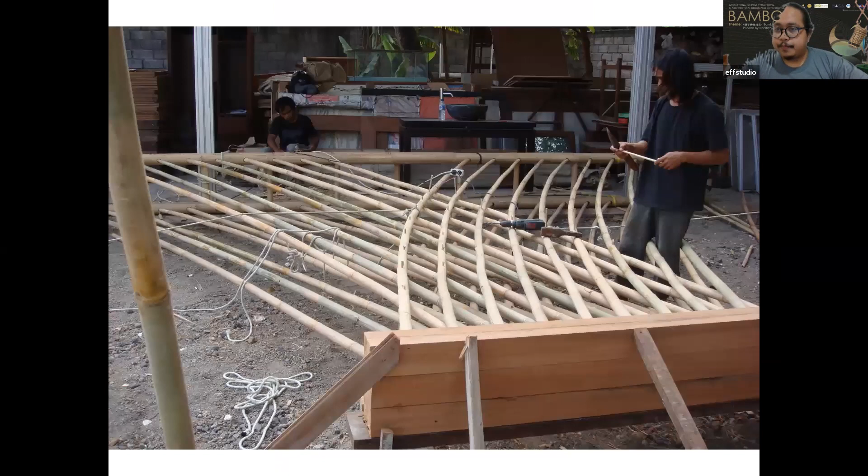It's about $50 maybe, to stand the tent up. So, okay, that's a good question. I'm thinking what kind of material, what kind of structures I need to make. So that's how I met with bamboo. That's how I realized that actually there are some materials in the world that are really nice, flexible, and if we are creative enough, knowing the characteristics of these materials, cross-bracing it - even though they are small, they're easy to bend into something.

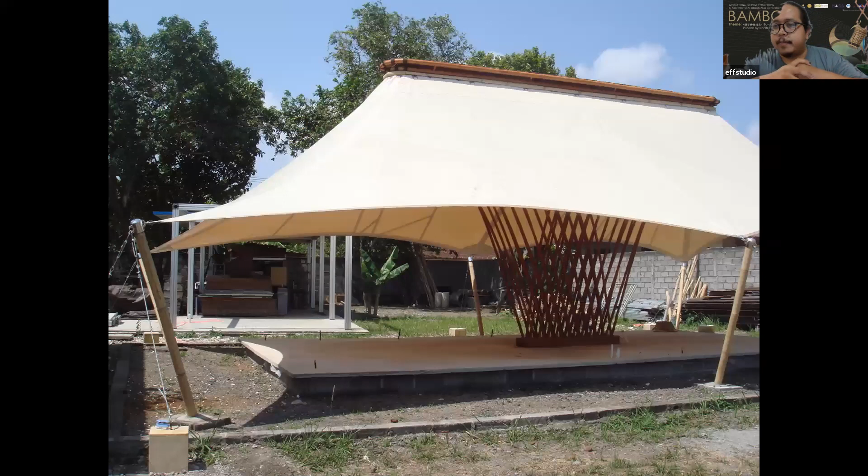So I just made a preliminary design, something like this, not yet really discussed with the engineers, but it ended up making something like this, and it happened - a $50 structure made of bamboo, still untreated. And when I discussed it with my engineer, there were still a lot of defects in the structure, but it stood at that time. It gave me confidence, like, oh, actually these are cool materials that I need to study.

Indonesia and also Malaysia have a lot of these materials. Why weren't we creative enough at that time to create something like this? And actually this is strong, it's beautiful, and it's cheap - consider cheap, consider effective cost. So after this, looking from the interior also, it's quite nice.

After that, I worked for a prefab company, which was kind of boring at the time. So in the art side, I was looking for a new challenge - like, why does something I build always have to be square and modular? At that time, the universe heard me, and there was a vacancy for architects at the Bamboo school, the Green School. So I applied, and then I joined them.

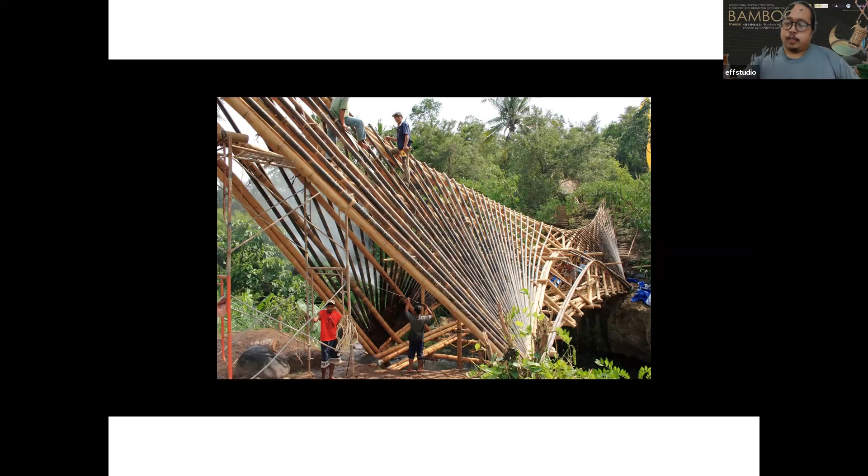I was involved with them from their early stage, before the school opened, with this bridge. Again, I think this story - what I'm telling you now, especially for the students, for the competitions - it's more about creativity, out of the box, trying something new, experimental.

So I'll show you mostly, like, when we developed the Green School, we did a lot of experimental things, like this - the top end of the bamboo, instead of throwing it away, why not make something fun? And that becomes a small shelter like this.

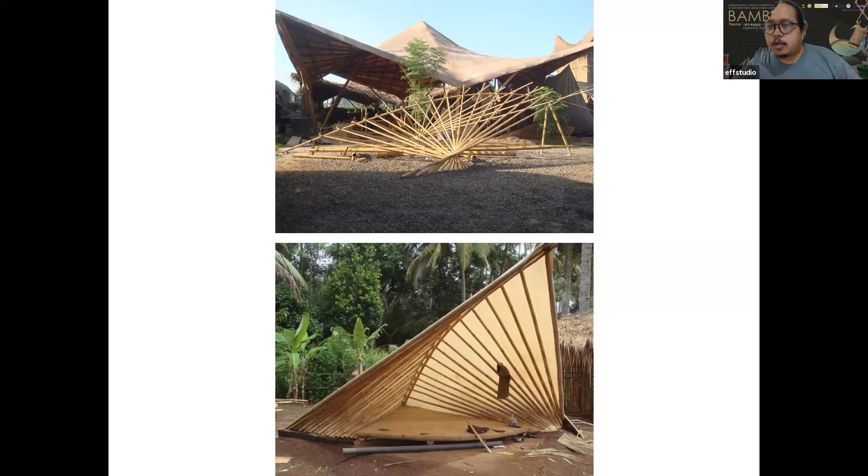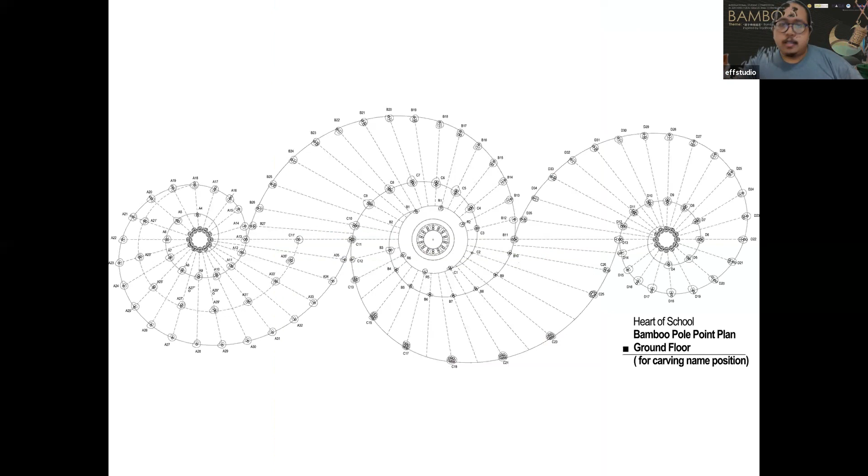And then the one I'm proud of, because I was responsible for the biggest building there, the Heart of School - I controlled the design, controlled the construction, 3 stories, one of the biggest bamboo buildings in the world, I think. And then my name is carved there. If you go there and get to the highest poles, there's my name - I asked the laborers to put my name there.

So again, but then I'm working for a person, for a boss. And as an architect, I'm trying to figure out, what if I go independent? Now my independent side, a little bit rebellious, I'm looking for a new challenge then.

So I thought, but then my knowledge maybe wasn't good enough. So I grabbed my savings and went to London to AA. I just took the summer course - not going for the master's degree, since that takes longer. A summer course would be ideal, a few weeks, 2 months I think. But it really helped me escalate my creativity.

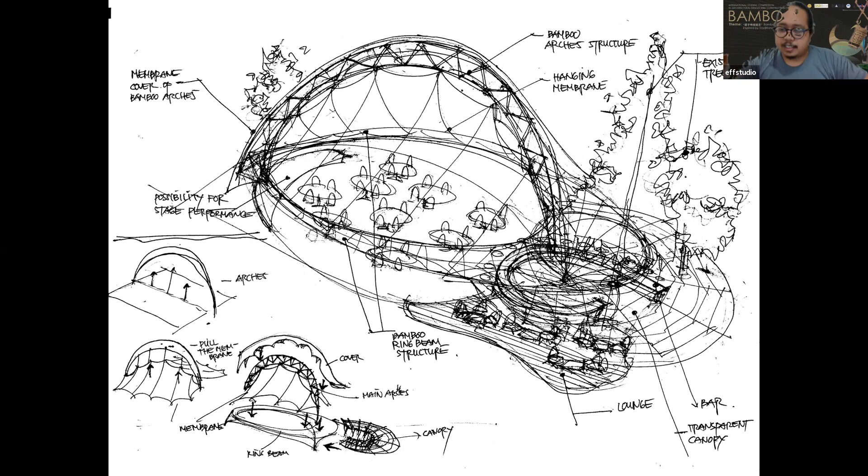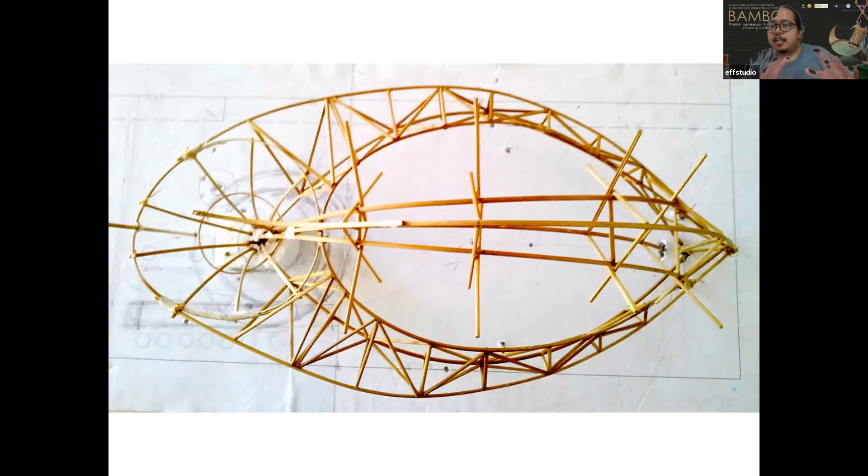Then we started making the models. We tried to discuss with our engineer to make it mix bamboo and steel structures - the style is space frame. But we needed that space frame for a 15-meter span with no columns.

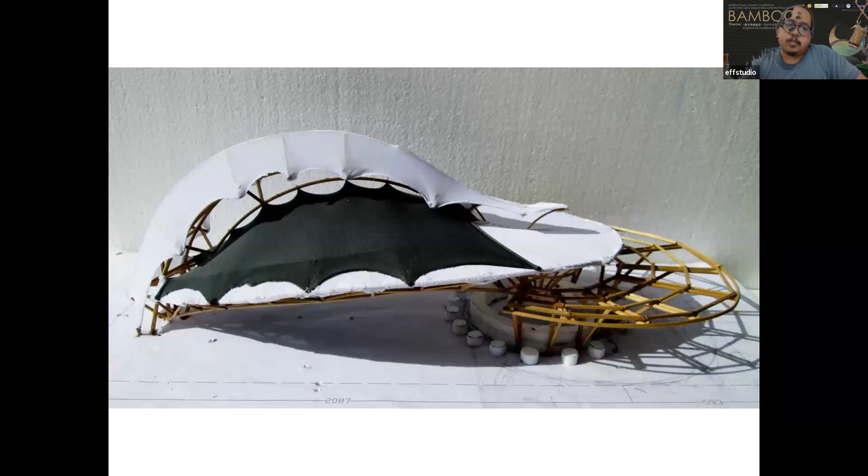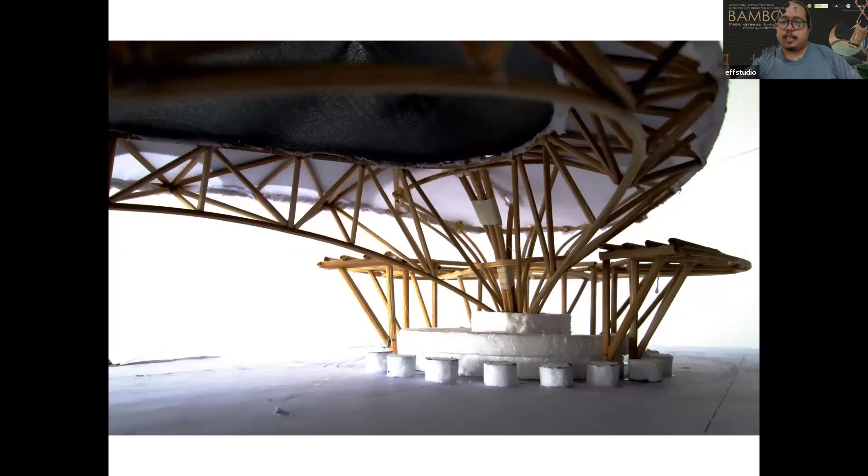And then we made the design of the membrane too, and this looked nice - our client liked it. But then we talked with the wind expert, and he said this will catch the wind, so when hard wind happens your building will blow away like a kite. This is just dangerous. So we studied the space more, and it became the round bar, which worked perfectly.

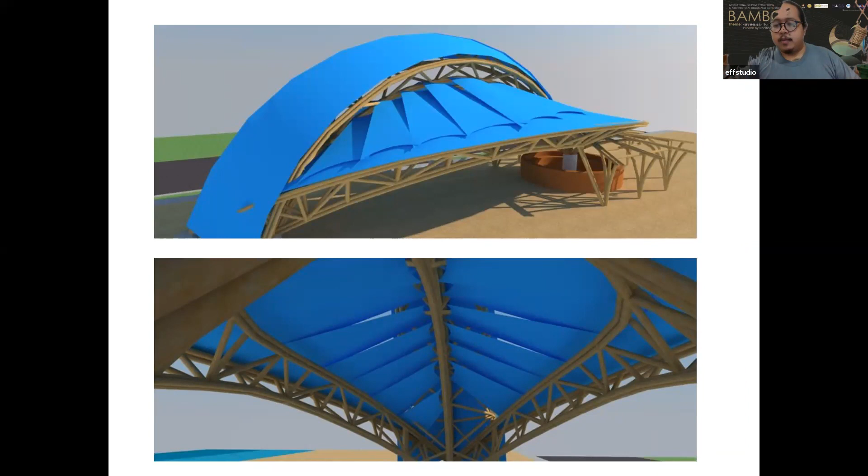We try to already place the membranes, but not in the middle one, and then we do adjustment. Since bamboo is lightweight, we need to make sure the wind can go through and not get caught. So we make it become kind of like fins when it's open.

It works well, it's eye-catching compared to the others. Actually, we are only one of the buildings that follow the rules, using lightweight structures, lightweight roof, and no floors. But unfortunately this is now demolished because the others were not following the rules, so the government cut them all. There's no excuse, because if we said we are following the rules but the others are not, when we cut the others and leave this one, it becomes another issue. But my client said it's okay, fun - at least we follow the rules, and at least they already got the big event points, so it's okay for them.

But honestly, these buildings brought me to exhibit in Frankfurt, Germany at the time. They were so pleased with these kinds of structures. I'm sorry if you want to see this one, it's not accessible anymore. We hope we will make something again in Greater Rawan in the future, but this looked nice, I like this.

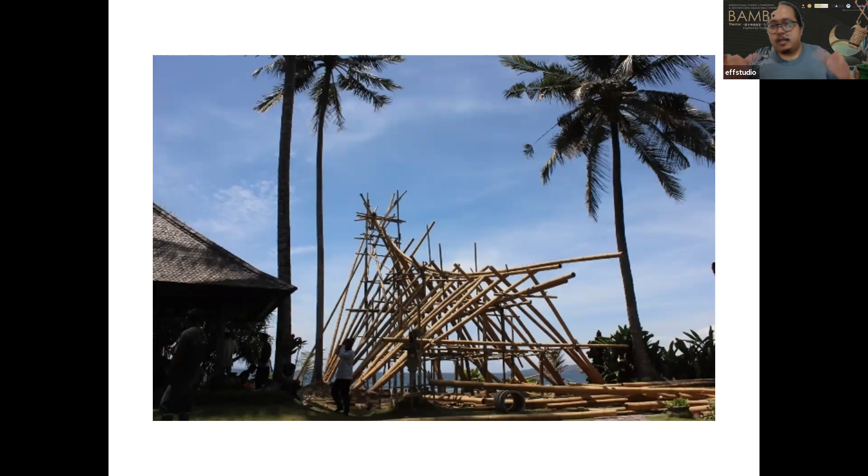That's one client, from Lotus. When we make one client happy, we hope they give us another job, so that's Lotus in Greater Rawan giving us a Lotus in Candidasa, East Bali - a small wedding chapel. I think it matches also with these competitions of small structures - it's small, but could be fun, could be really interesting. So the chapel has triangular structures, really solid structures.

But the thing that makes it different for us - the rafters. Mostly the rafter is vertical, but we try to make the rafters horizontal, using the characteristic of the bamboo. If you see that spread out, that can only easily be done with bamboo. If you make that spread layout rafter with wood, it would be difficult - you'd need to bend the wood quite hard. But we just tried to understand and apply the possibility of using bamboo materials.

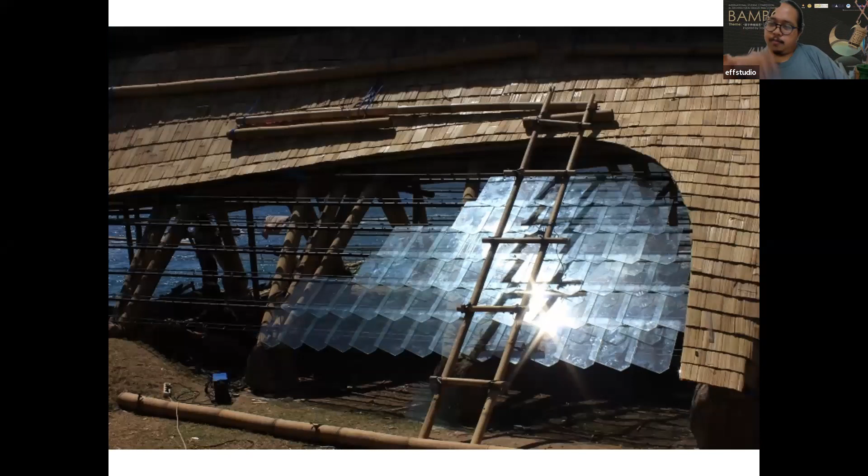This looks amazing as a ceiling from inside, that pattern of the rafters. And the one thing that makes this project more interesting - we needed to make transparency on the sides, because if all the roof goes down, it will be dark. But at the same time, it would become a wind tunnel if we had a solid surface. So we used this kind of fish scale custom-made glass with a gap between the glass pieces, which was really difficult to draw and difficult to supervise during construction. But when it was done, we were really pleased with it.

It's really a small structure, only about 6x4 meters or so, but it looks amazing. In Indonesia, because it's considered a semi-permanent building, we can build more than the retaining wall of the beach, which in other areas you maybe cannot build something like this. From the sea point of view, there's a lot of boats crossing from Bali to Lombok in front of this resort, so this becomes an icon of the resort. Everyone passing by asks what kind of building that is, and wants to go there and take a photo.

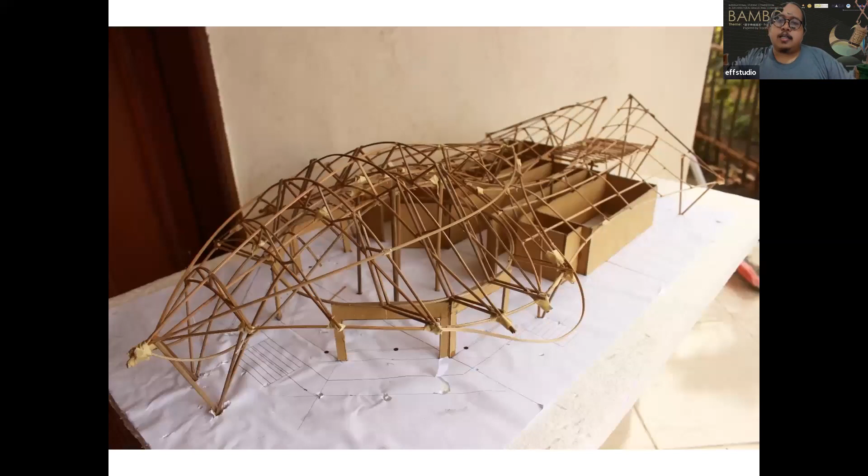That's another project from Lotus. After we accomplished the wedding chapel, they wanted to rebrand and refurbish the old buildings, their main building and restaurant. As you can see in this model, the cardboard one shows the concrete structures that we want to keep, but the roof before was very simple.

Like a saddle roof, and then we changed it to a bamboo roof, something like this. Because their logo is a manta ray, why not make a manta ray for them? So it's manta ray structures, and I'll show the drawing details we made for them. It's between manta ray and something behind, but yeah, it's this manta ray covering the existing structure. So it's old and new.

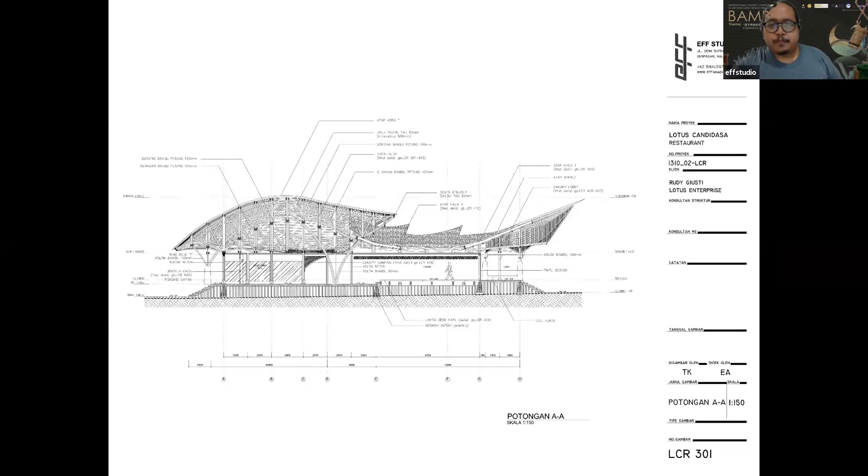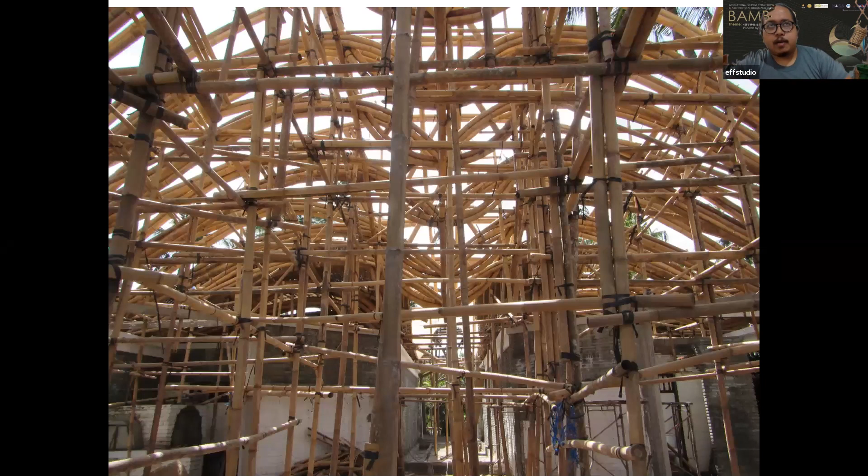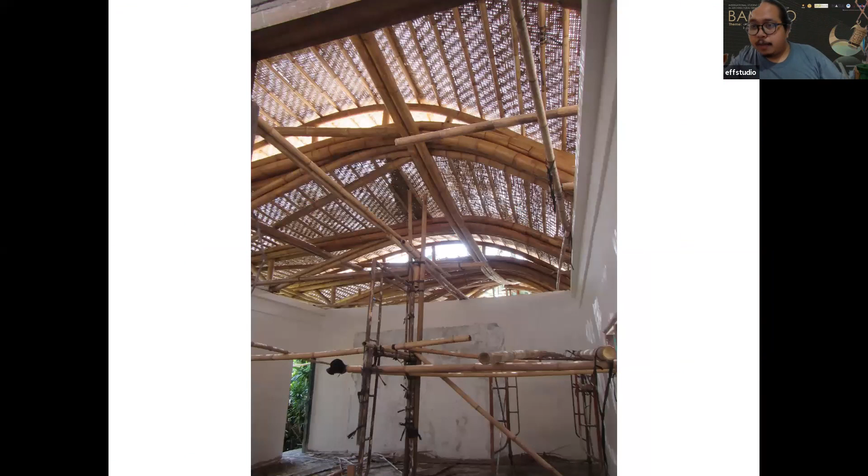This is when it's almost done with the ceilings. We did it a bit parametrically, but manually parametric, because the laborers cannot read Rhino scripts or something. So we make the model and make sure every single opening is slightly different and twisted, which is cool.

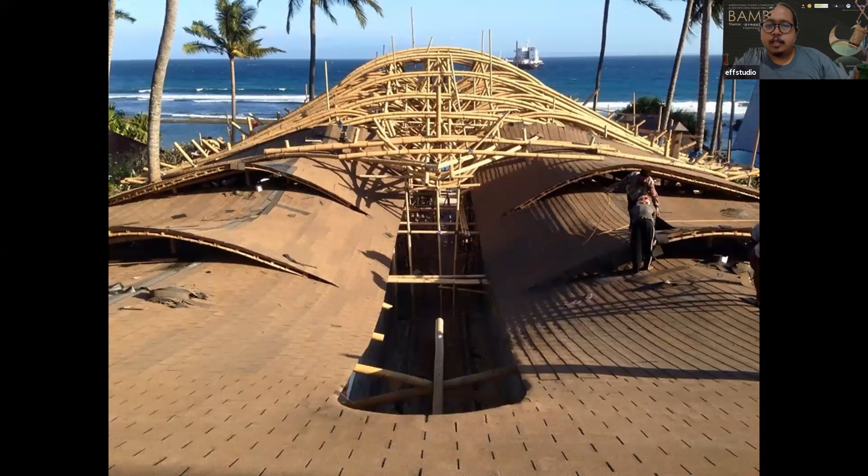You can see this is from the top. We use asphalt shingles because the roof angle isn't that steep, and it works. It's less maintenance, and anyway not many people will see it from here. The guests mostly see from there. This is the entrance, where we put the skylights.

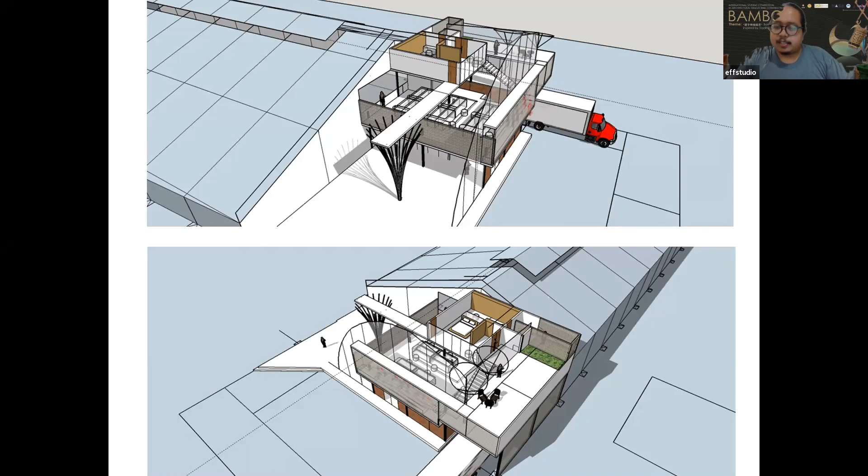But then the client asked us for the front portion of the factory to have a bamboo roof. So they challenged us to design a bamboo roof with a 30-meter span. Not competing, so: the steel 30 meters is easy, but bamboo, how about bamboo? Can you accept the challenge? And yes, we accepted it. So we made models again.

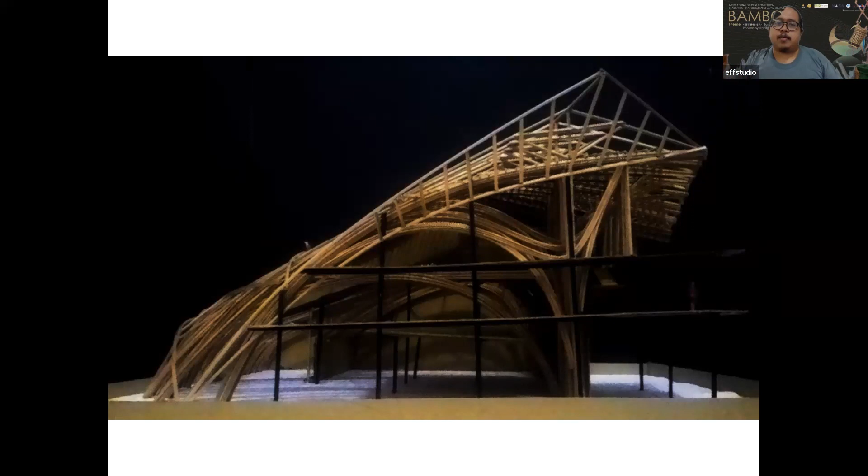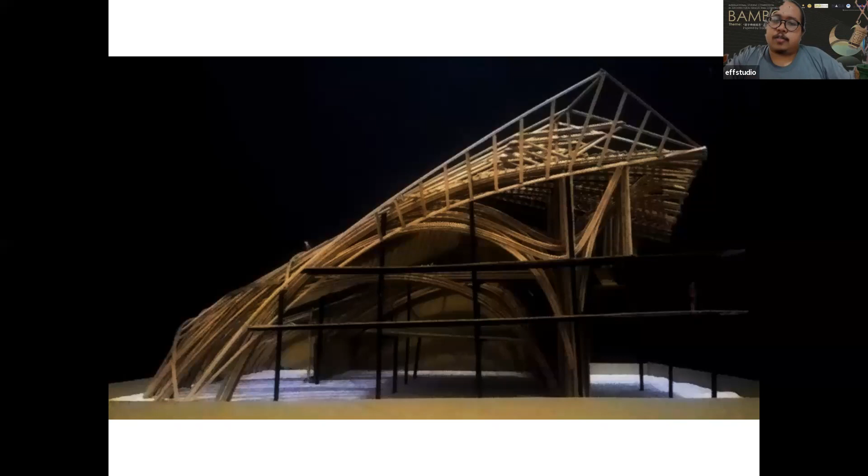So we still use steel structures for the floor and the wall, the facade, because they will hold a lot of glass. But inside, we use bamboo. These are the kinds of structures we made—a series of long truss structures, like 30-meter trusses.

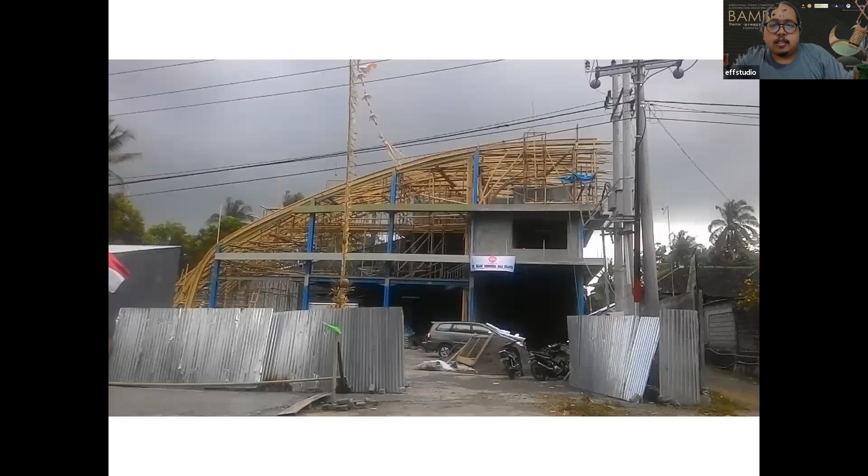This is from the front. In the front we still use steel because the glass is heavy and holds a lot of wind load maybe, so bamboo isn't strong enough for that. So we combine them, and again these structures are really organic.

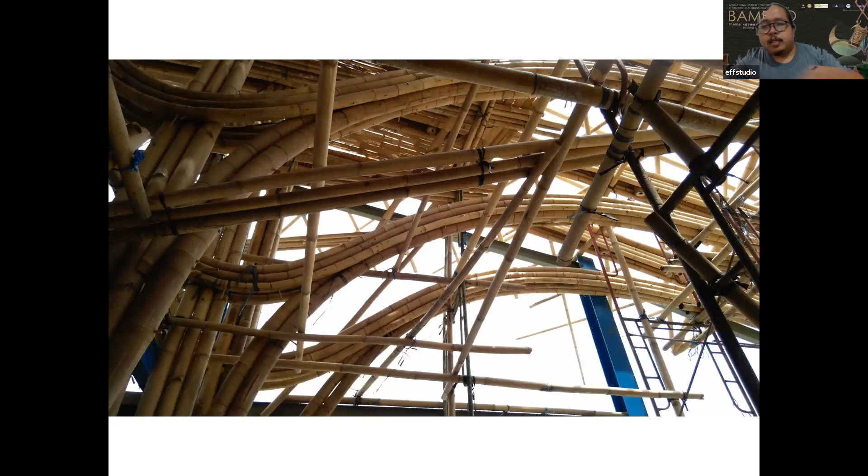We try to get curved bamboo and bend it here, combining it as you see—this is from the second or third floor. You see that series of bamboo truss we designed, a little bit melted somehow. And that's my stuff, the proportions with the big-span bamboo truss structures.

So it can be done, it's 30 meters. And anyway, I'm confident enough because the roof is very lightweight.

The metal roof is very lightweight, so I'm okay with that. If the roof were roof tiles, I'd need to think about it more, but because the roof is metal sheets, it could be possible.

So this is from the front. We designed the front to not be massive glass, so the wind can go in, reducing the use of AC. From the outside you will see glass, but when the lights are on, you will see the interior bamboo structures. I don't have photos, but you can go to Bali and see it in person, it'll be nice.

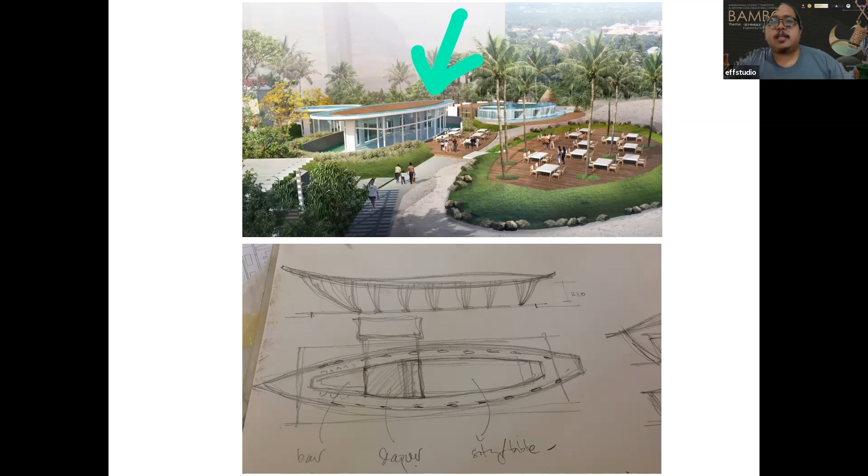And this is the boat wings, I will say. That's another challenge from our friend architects who designed the resort. He had a challenge of how to make an iconic restaurant. It's called Cukung, which means like the boat. My friend tried mimicking the boat shape but it didn't work. He said, okay, let's make it work. So we made the models.

We're not against using other materials - for example, for the kitchen and bathroom, it's okay to use concrete, I think it's better. But for the rest, we can combine with bamboo. I'd like the combination between concrete, some steel, some glass, with bamboo - bamboo and friends, instead of all about bamboo. The bamboo still becomes the main agent to make it the characteristic building.

Another request from the guests - because this is in Nusa Dua, mostly guests from China, Taiwan, and Korea - they love to see the beach but don't want to get burned, they don't want to get tan. So they need an AC box while seeing the beach view, compared to American or European guests who maybe love being tan or dark. We need to understand this kind of tourist and provide for them.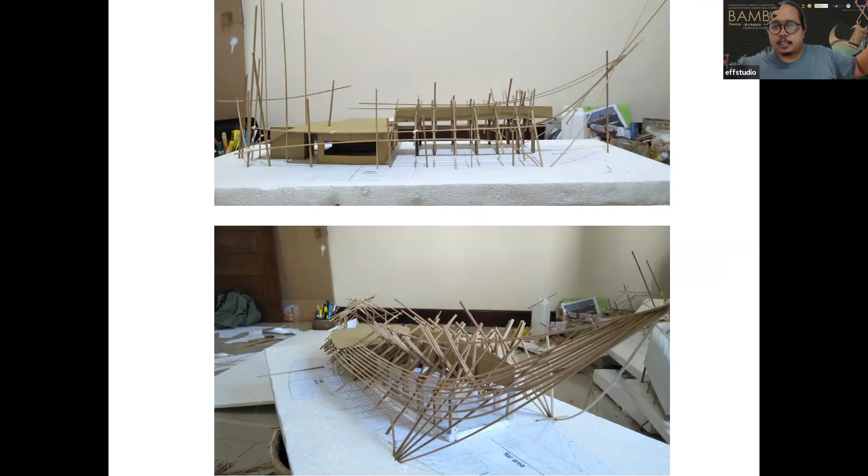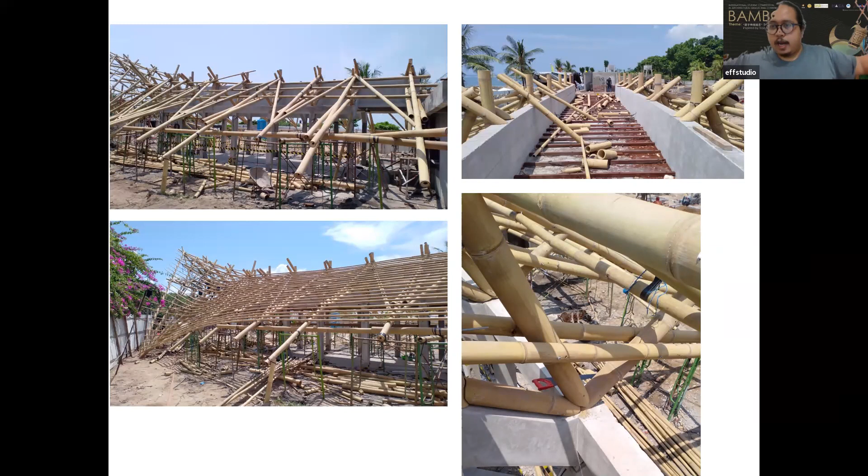So our idea is to make a glass box in the center, and put two wings attached to the glass to cover the outdoor, semi-outdoor dining. The shape looks like a jukung, like a boat. We tried to make another challenge with cantilever structures, so all the structures are centralized in the glass blocks, and the bamboo truss overhangs like 4 meters.

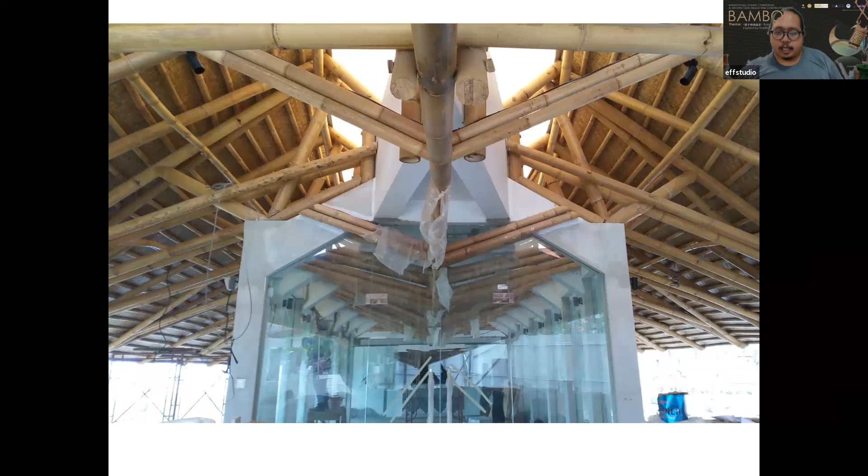This is when it's done. Again, it looks like a jukung, but the one I really like is this - glass structures in the center, glass with concrete, while the two wings overhang 4 meters to both sides. The advantage is that when you sit there, there are no columns bothering you. It's like 180 degrees, but you're still protected - you feel like you're outdoors but protected by the roof. For me, it looks amazing.

The clients really like it. Let me talk about the money here - they said their break-even point was only 2 months. I thought, I need to charge you more then. But actually, we love that the clients are really happy with this, and we're hoping to hear from them again to build another restaurant in their other properties.

When we push our challenge and create something that works, it's worth it. There's no bamboo buildings with no columns like this in Bali - I think this is the first time, so it's a good achievement for us. Again, this view gives you a nice, undisturbed view, but protected by the roof. That's the interior - we still put bamboo inside, not leaving it only for outside. So when people eat inside with the AC, they still get the bamboo feeling. That's the bar in the end - everyone loves to see the bar.

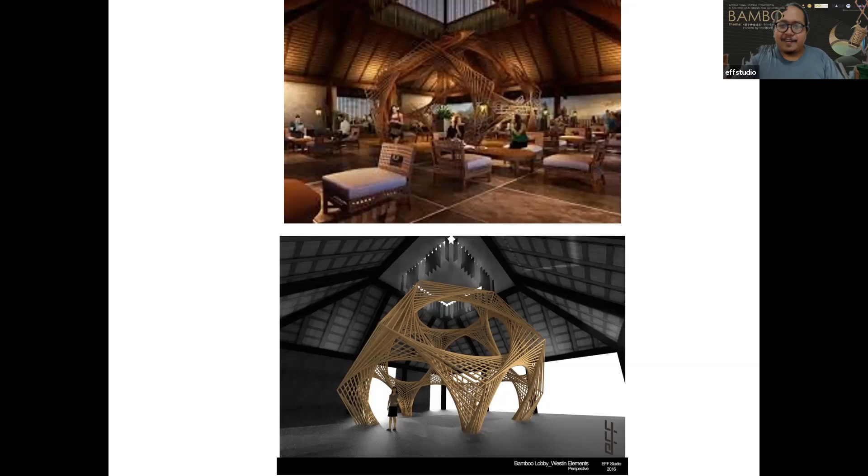We make the models - I mean not me, at least my staff. I'm just asking them to make this. It's really a headache, but then we got the ideas. This is a dodecahedron, a 12-sided polyhedron with a hyper in its sides. So they mix of them.

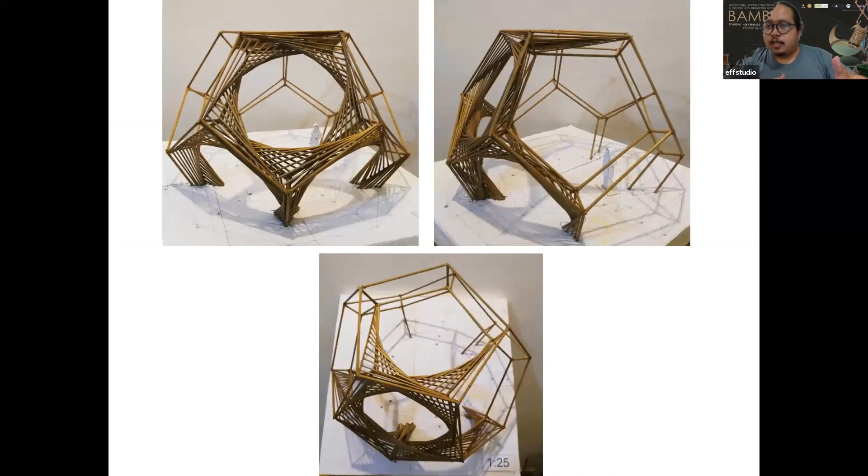To make these models is one challenge, and then to build on site, that's another challenge, because my staff had to be there every single day for about 2.5 months to guide the laborers - okay, this point going to that point, this point going to that point - because this is really hard.

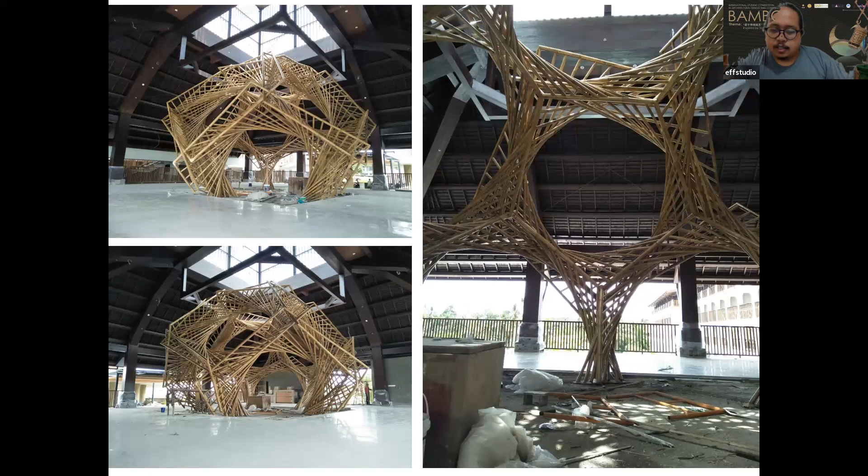But when it's almost done, it looks like, okay, it kind of works. And when it's done, a lot of people want to take photos here. So for me, I would say the design of the resort - a lot of resorts do the same thing - but because they have this stuff in their lobby, it makes the resort different and stunning. That's what we're trying to do. EFF Studio, maybe not designing the whole resort, but we designed, or actually this is Sonny Sutanto's design, and we make it work.

Making something like this - that's the lobby, and you see that structure in the center. Looks amazing. It's not that big, but it's complicated, and we were happy when it's done.

After that project, our studio thought, actually we can catch up with that kind of modern thing in the architecture world - like you guys, students mostly doing the parametric thing, making Rhino models. So instead of only doing models in 3D, why not develop really the main structures? But then the challenge is the material is expensive, so why not use bamboo? So we made another experiment with the hyper parametric thing.

We got the chance to be invited to make installations in Lampung. So we made a crown structure, and we introduced to the local people that you can use whatever bamboo you have - no need for a specific bamboo.

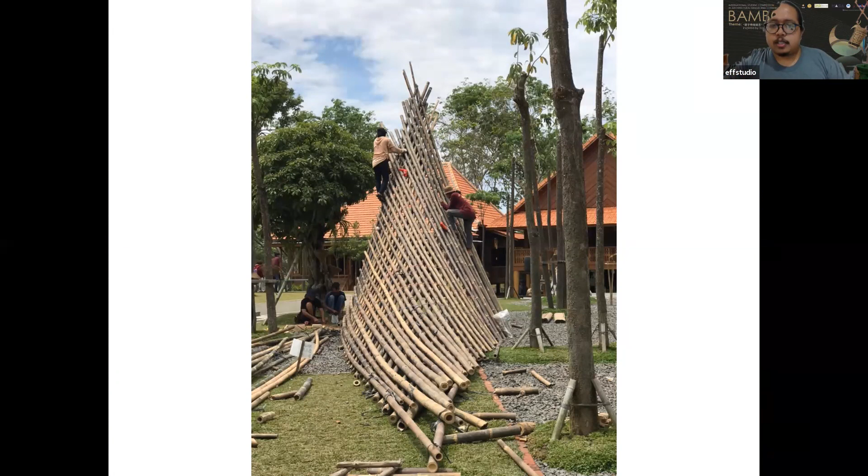And we made another one. We wanted to show that bamboo is so strong, not only as a structure, but you can walk on it. So we made a hyper bridge. This is the bridge before we flipped it - we made a really solid hyper structure like that. This is when it's done, crossing an alleyway below. This is a 10-meter simple bridge.

If you see this one, the bridge is there. Before getting to the crown, you pass the bridge first. So it gives people in Tubaba, Lampung, who know bamboo but don't know how to use it, or don't think bamboo is useful, a reason to start believing when they pass the bridge. They say, oh, it's strong. Yes, it's strong, even you can jump there, like 10 people jumping, and there's no problem with the structure.

I think the Bupati is happy. I'm still approaching him to create more bamboo buildings there in Tubaba, to show the people in Sumatra that bamboo can become something nice.

This one, I think the last two, we also got invited from the country Taiwan, in Taoyuan, to become one of the exhibitors in a Taoyuan art installation in 2020, as one of the artists from Indonesia. So it became like, okay, I would say the bamboo ambassador.

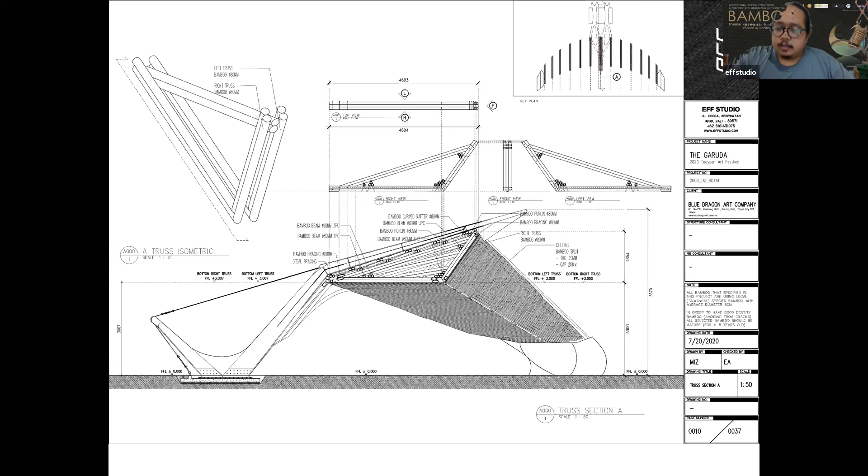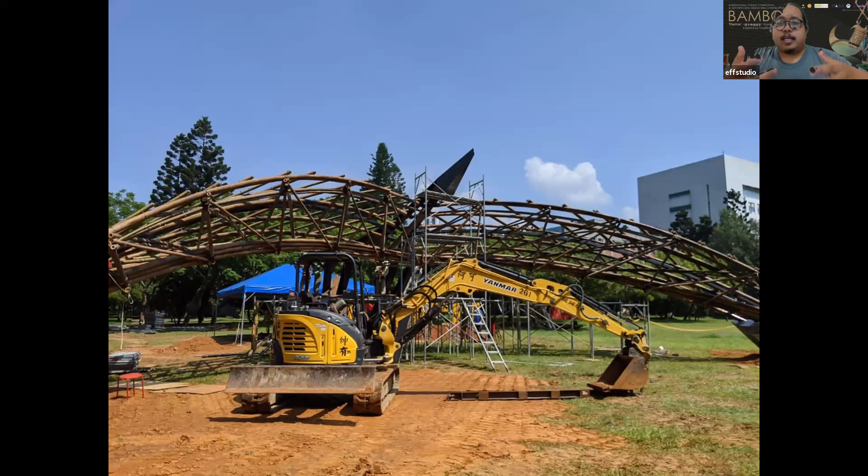We made really detailed plans because we couldn't go there, so we needed to make sure the bamboo laborers in Taiwan could do it, and they did it really professionally compared to what we've done in Indonesia. They used all massive tools, but I can't blame them. This isn't really what we wanted, but they improved it themselves. Still, okay, the wings are a bit broken, but it still stands there.

This installation was only supposed to be for one month, but they said the mayor of Taoyuan really liked it. It's built inside the campus, so they've kept it, I think, until now - it's been more than a year. They said they'll wait until I come there and touch the Garuda myself, but let's see what happens with Corona. So I just get pictures from them.

So yeah, these structures for us are really nice - representing Indonesia there, and they're following really what we want to do. I mean, when I say A, they say A. It's really professional. I really like working with people like that.

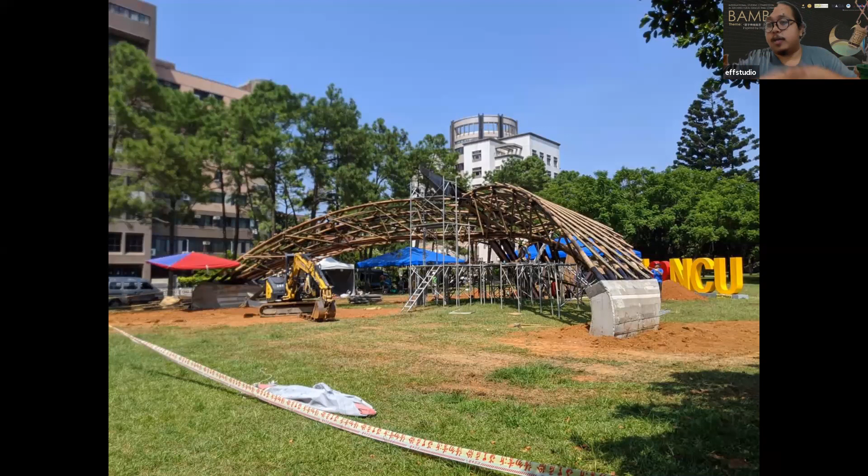This is the last thing I want to show. All the projects we've done are always pushing our creativity, always pushing our boundaries, but for sure trying to be responsible in any way. This should have been done if Corona wasn't happening, but now it's still pending.

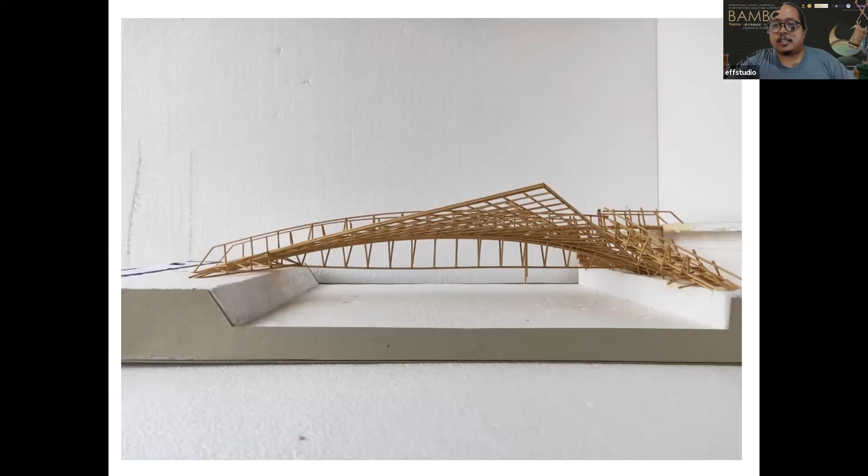This is us trying to go into infrastructure - this is about a bridge. I'll just give you a teaser. I think this bridge design has never been done before. This is only the side view, I'm not showing you the top view yet, but this will be a 30-meter span pedestrian bridge, not for cars or motorbikes.

effstudio is designing this, and it's been approved by the government and approved locally. This will be in Bali, in a local village. We're just waiting until the Corona conditions get better, and then we'll build this one - another achievement in designing bamboo structures.

I hope that by always creating something like this, bamboo's opportunity gets better in society. I mean, people start believing, oh, actually a 30-meter bridge, easy with bamboo - no need to always use steel or concrete. That's what we're trying to do, while also loving to have something unique and unusual. I think that's why most of our clients come to us - because we're trying to be different and give a new experience.

Yeah, I think that's my story and effstudio's story. I hope you guys enjoy it and get inspired. Thank you.

Okay, thank you, Mas Effan. Impressive work you have done, it's very inspiring.